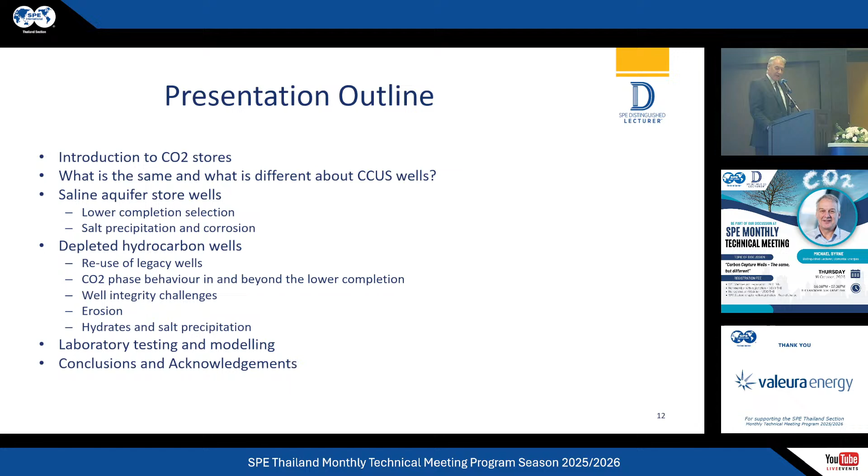I'll talk, because it's where I come from, about laboratory testing and about modeling, and what we can do in order to try to solve some of these new challenges that we have in these different types of wells. And then, of course, I'll conclude and acknowledge.

So what is CCUS? Carbon capture, utilization, and storage is the removal of CO2 either from emitted gas or directly from the atmosphere, the utilization of that CO2, for example in enhanced oil recovery, and the storage in subsurface reservoirs or what we call stores. But essentially these are very similar to the reservoirs we've dealt with in oil and gas for many years, and sometimes they're exactly the same because we're just putting CO2 back in.

This presentation won't talk about capture or utilization. I'm just going to talk about storage and the wells that we put into those different types of stores and the challenges with those wells. So I'm focusing exclusively on storage in the two different types of stores.

Oh, sorry, it has gone.

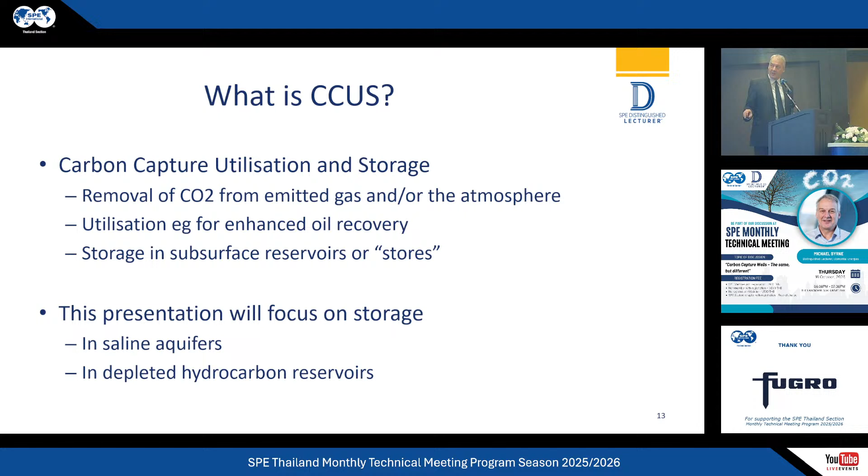So the first question: I said there were a lot of things that were the same about these wells as we're used to in oil and gas and water injection. So what's the same? Well, the broad purpose of these wells is the same - they are to connect the surface to the subsurface, to allow efficient communication between the surface and the subsurface. That's what any well we design and implement is for, and that's exactly the same for carbon capture and storage as it has been for oil and gas production wells and water injection wells.

And of course, we need to consider safety, well integrity, the upper completion, the lower completion, and the sand face design. Again, that's the same as we're used to, nothing different there. We need a multidisciplinary approach. If I've seen any change in our industry in my 35 plus years in oil and gas, it's that we've become better at multidisciplinary approaches. There's less of a siloed mentality now where drilling drills the wells, completions complete the wells, and production produces the wells. That integrated multidisciplinary approach across subsurface, production technology, production engineering, completion engineering, through to drilling and completions departments is much more effective, and it's absolutely required in carbon capture and storage wells.

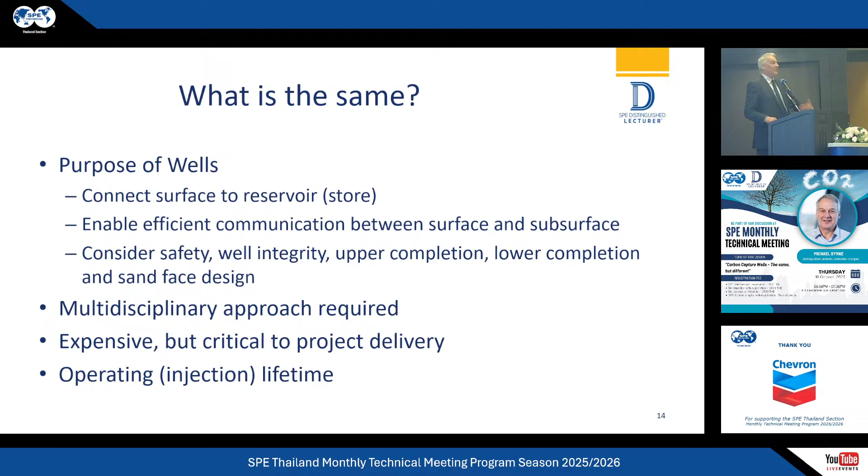And the operating or injecting time - the time we'll be injecting CO2 for - is broadly similar to the time span we design oil and gas wells for. It's maybe 5 to 50 years, depending on the well and the reservoir or store, but that's typical design life, so the injection lifetime of those wells is pretty similar to what we're used to. So lots of stuff is the same when it comes to carbon capture wells, and that's probably a good thing - if you're moving from oil and gas into carbon capture and storage, we have a lot of knowledge.

But there are some things that are different. Starting point: CO2 is different. It's unlike oil and gas and water - it has very interesting, challenging behavior that we need to understand when designing wells. We need to understand what the differences will be, we need to understand temperature, and we need to understand the phase behavior. This is a relatively simple phase diagram here.

Showing the phases of CO2. I say relatively simple because when we deal with CO2, we have to deal with enthalpy rather than just simple phase behavior, but for simplicity in a short lecture I'll leave it at this. We need to understand where we are in this phase diagram with the different types of stores we're dealing with, and therefore the wells into those stores. It's really important that we understand that fully, perhaps more so than when we're dealing with just water injection, where we're essentially dealing with single phase all the time. Here we're dealing potentially with multiple phases during the injection process, in the wells and in the store.

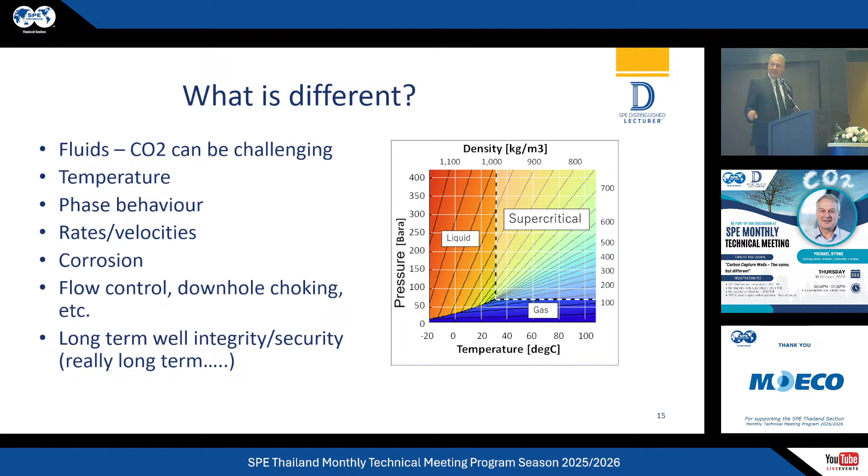So getting into the detail of these two different types of stores, I'll deal with saline aquifers first. Saline aquifers are basically just big reservoirs filled with water at usually significant depth in the subsurface. Because they're already filled with water, they're often at hydrostatic or normal pressure, and therefore any CO2 we introduce to those stores is going to increase the pressure in the store. So we're probably going above hydrostatic. What we need to ensure is that we can do that without compromising the seal on that store or reservoir.

For that reason, we need these things to be pretty big. We need them to have great lateral extent. And so when we're talking about an injection well, the reach of that well, which is permeability dependent, can be quite significant—it can be several kilometers, which is not necessarily what we're normally talking about when we design a water injection well. So again, that brings us some challenging design criteria when it comes to the well design.

The CO2 plume in a saline aquifer is gravity dependent. CO2, regardless of the phase it exists in—whether liquid, dense phase, or gas—will have a lower density than water. What that means is that the CO2 will tend to rise to the ceiling of that store. That's important because we're trying to manage the placement of that CO2 into the store, and it might lead us to change our well design, for example to inject more towards the base of the store to give us a greater volume of injection as the CO2 migrates up towards the ceiling. So there are some interesting design challenges when it comes to saline aquifers.

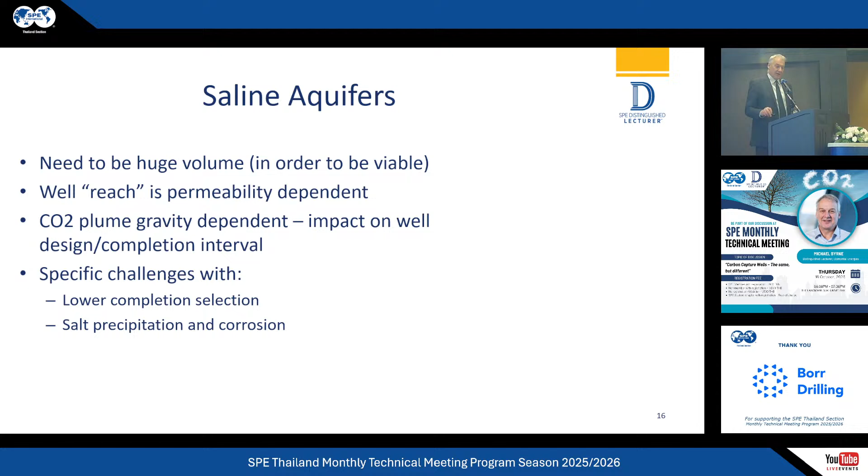We also need to think about the lower completion selection, salt precipitation, and corrosion, and I'll deal with each of those in a little more detail. So what about the lower completion? You might think, well, these are just disposal wells—we're trying to get rid of as much CO2 as possible. Do we not just keep it really simple? Case, perforate, inject CO2. Well, that might work for some stores, and I'm sure it will, and does work for some stores.

However, we need to treat these wells as we do with water injection wells for the potential that sand may come back into the well with time. With shut-in of the well, we may have cross-flow, where we have higher pressure in one part of the well than another, and that pressure equalizes through the well, potentially filling the well with sand. Or we may have a fluid hammer effect—so when we stop injecting CO2, we may have a pressure wave that can draw sand back into the well. For those reasons, we may want to deploy sand control, sand screens, potentially gravel packs in these CO2 injectors.

And to those of you working in oil and gas, you'll probably be thinking that introduces a bit of complexity. It introduces a little more challenge in terms of the fluids we can use, how we use those fluids, and how we get rid of those fluids if we need to before we start injecting CO2. Ideally, we would like to flow back these wells—we would like to produce them before we inject.

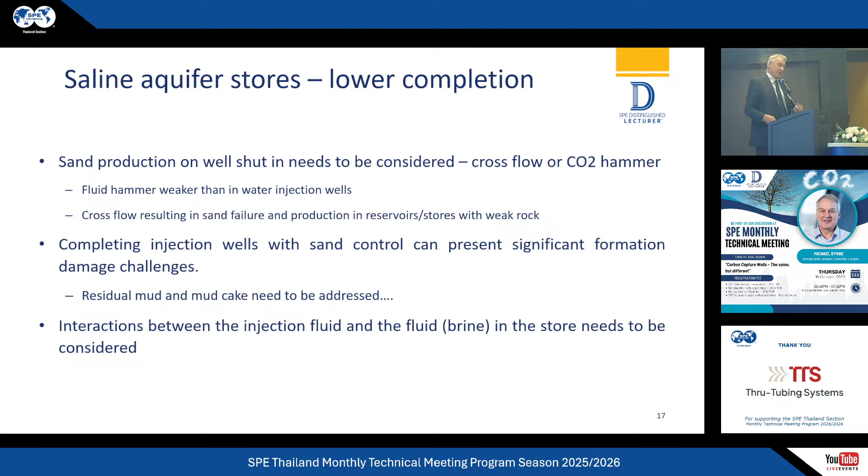When we complete with sand control, we really would like to flow back because we have a residual mud cake, regardless of how we've completed the well, whether it's standalone screens or open hole gravel pack. We will undoubtedly have something in the well that we'd normally want to flow back. We need to understand what happens when we drill these wells, because if we don't flow back, we chase drilling mud and completion fluid into the formation with CO2. We need to understand those interactions, which will differ from what we're used to in conventional wells.

For saline aquifers in particular, salt precipitation is a risk. We're injecting CO2, which is essentially a solvent, into a water-saturated near wellbore. We will undoubtedly dry out the near wellbore to some extent, precipitating salt. That is a challenge. If we precipitate salt in the near wellbore, will that affect our injectivity? There's no simple answer, but it's something we have to try to understand.

The salinity is very important. If we've got very high salinity, then the salt risk is higher. In saline aquifers, we have quite an abundant supply of water and therefore potentially salt, and we may have recirculation of water through the store. If we're just injecting at the top, we might have water coming back into the wellbore or near wellbore, bringing a fresh supply of potential salt. So this salted region in the near wellbore is definitely a challenge, particularly early on in a development.

The long and well-established Sleipner CO2 disposal project in Norway, which has been running for at least 20 years, had significant salt problems early on, and they had to water wash their wells frequently early in the development. Once they'd overcome their initial salting problems and essentially pushed most of the brine away from the wellbore, the problem disappeared. So it's something we need to be aware of in order to preserve our injectivity.

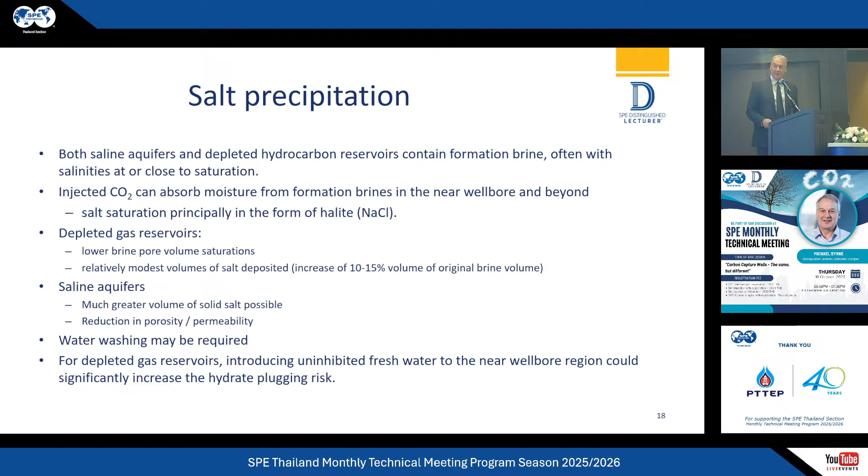Another risk, not exclusive to saline aquifers or to CO2 injection wells, is corrosion. With pure CO2, where there's only CO2 in contact with the wellbore and near wellbore, corrosion is not a risk. CO2 on its own is not corrosive. However, when we mix CO2 with water, we have the potential to generate carbonic acid, and carbonic acid is corrosive.

For that reason, we may have to deploy corrosion-resistant materials anywhere there's a risk of CO2 and brine being present together, either during injection or during shut-in periods. The shut-in periods here are critical. You might like to think that you can design CO2 injection wells to always be on injection and never shut them in. We know from our experience with water injection wells in the oil and gas world that this is not a practical aspiration. We will have to shut in these wells from time to time.

There are projects where delivery is by intermittent supply, by trucks or by ships, where we're designing in shut-in periods, and we'll actually be injecting for less time than we're shut in. All of that means that when we shut in the well, we need to understand if there's a risk of brine flowing back into the well, and if there's a risk of convection currents developing within the well immediately after shut-in that could carry brine or wet CO2 higher up into the well.

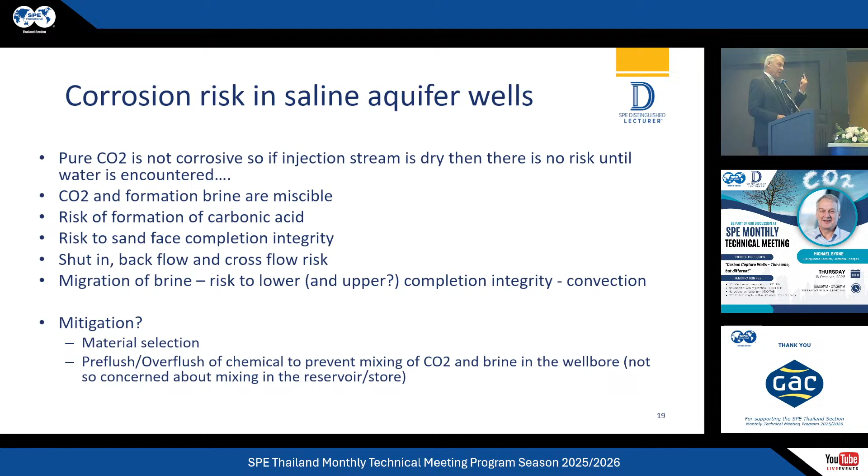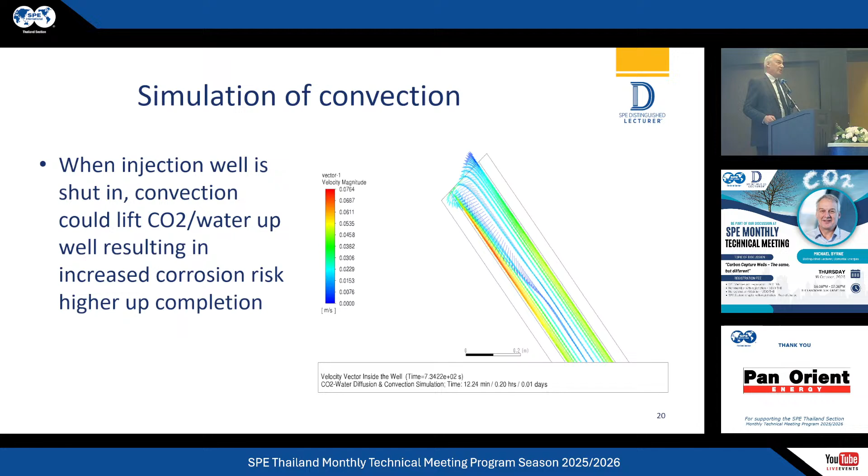This is a very important cost consideration in some developments, particularly in saline aquifers. You can see the animation has started again, showing all of this energy, all of these velocity vectors, representing the transfer or convection of fluid up the well once we shut it in.

And unfortunately, we're not just dealing with CO2. Most of the CO2 sources will be contaminated, meaning they won't just be CO2. In many cases I've worked with, we're looking at up to 5% contamination, and that contamination is expensive and difficult to remove. So we may have to accept sulfur oxides, nitrogen oxides, carbon monoxide, hydrogen sulfide, water, and more in that injection stream.

Now, many of these substances simply increase the corrosion risk, because not only might we have carbonic acid, but we can also have sulfuric acid and nitric acid, and these acids will increase the corrosion risk and mean we have to do something to mitigate.

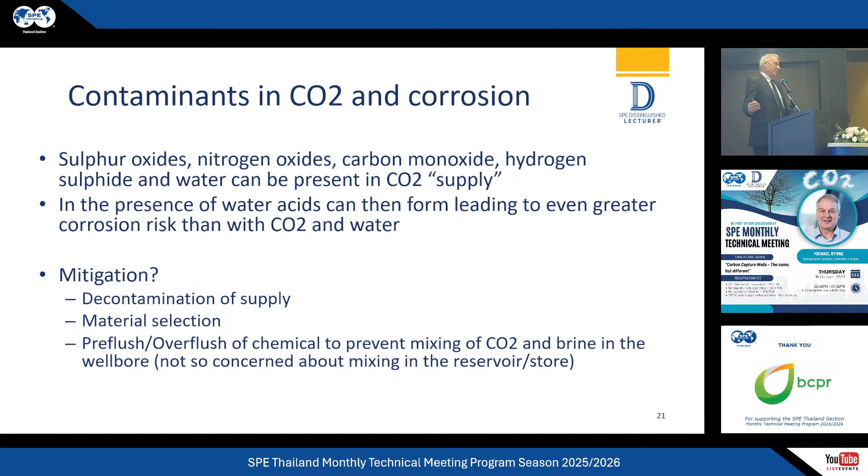Mitigation could include decontamination of the supply. It's three easy words to put on a slide, not so easy in reality, so it's important to consider. Material selection, of course—we can go with very high-grade alloys, adding significant cost. So we really need to understand this properly before we go down that road. There are also some chemistries we may be able to deploy to try to keep that mixture of CO2 and water away from the wellbore. Deeper into the formation we're probably okay, but it's in the wellbore that we need to be careful.

Okay, so moving to the second type of store—I said there are two types. Saline aquifers, I've dealt with some of the challenges there. Depleted hydrocarbons are in many ways quite different. These are reservoirs we've produced, usually for quite a long time, removing most of the mobile oil, or predominantly we're talking about gas reservoirs where we've removed a lot of the gas. That makes them almost ideal stores, because we know they've sealed that hydrocarbon for millions of years, so we know they are robust. They're essentially empty.

We've taken out a lot of pressure, we've taken out a lot of fluid, and we potentially then have a very simple solution to disposing of significant volumes of CO2. And of course, there are many of these stores being developed at the moment.

In these stores, though, some are so depleted that it's really difficult to drill new wells, because we've depleted down to such low pressures. I've worked on stores or potential stores where we're down below 100 psi. Now we're talking about drilling and completing into something with only 100 psi. So at the very least, we're going to be at significant overbalance when we drill and complete. And in the worst cases, we can't reasonably drill and complete when the store pressure is so low. So there are some considerations we have to have there.

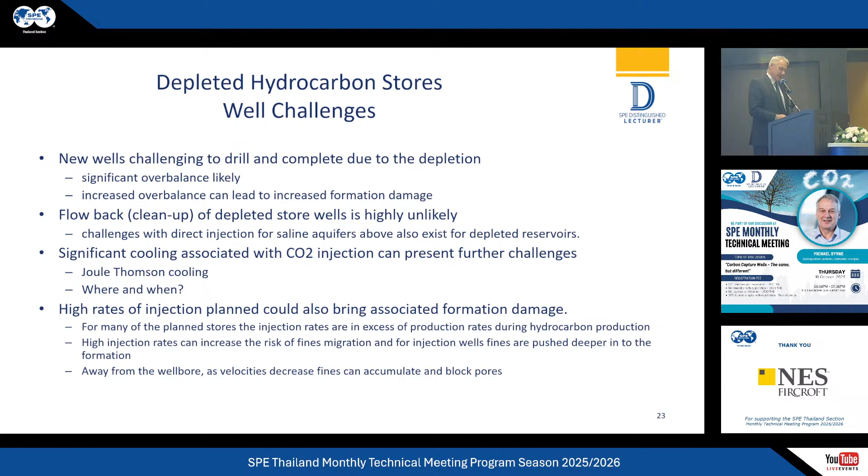We've got 400 million in some of our wells, but 200 million is still a pretty high rate. So we're used to that rate, but what we're not used to is less than 100 psi of store or reservoir pressure. What does that mean? It means very high velocity. If we have a combination of high rate and low pressure, that leads to high velocity, and I'll come back to that with a couple of examples.

One of the options for depleted hydrocarbon stores that are at very low pressure is, well, we've got all these wells that we've been producing from. Could some of them be turned around and used as injectors? These are often called legacy production wells, although I worked on a project in Spain recently where the operator liked to call these wells not legacy, but vintage wells. I'm leading a campaign to change the name legacy to vintage, because I think it sounds better. But anyway, these wells that have been there for a long time in these stores, could we not just use them as injectors? One of the good things is that that's relatively low cost.

We don't have to drill them again. We may not even need to complete them again if the completion interval is appropriate for CO2 injection. So that's a pretty good thing. That overcomes the challenges we face where we might not be able to drill new wells. So let's get some pressure in there through these vintage wells, and then we can drill new wells potentially for higher rate injection. They've also effectively been cleaned up for a long time, maybe producing for 30 or 40 years. The near wellbore in those wells, in my opinion, will often be pretty well cleaned up. So they seem like ideal candidates.

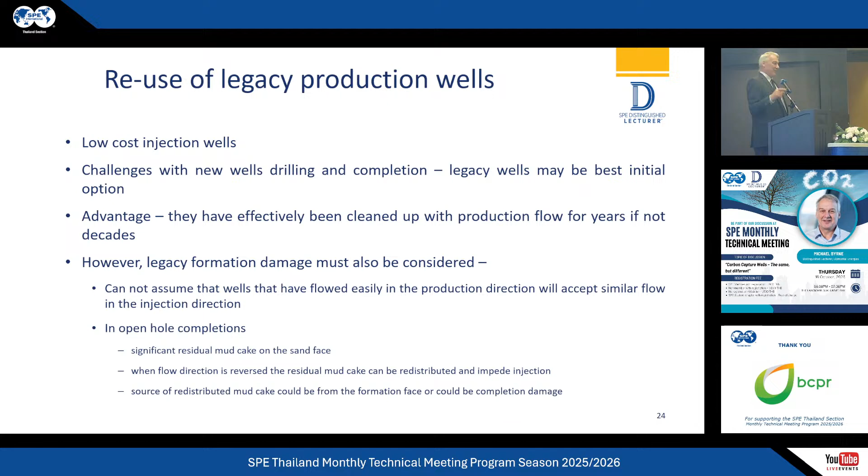And that might lead us into a situation where we have to, early on, create or develop some non-matrix injection. That's the politically correct term. Anybody want to say what non-matrix injection is?

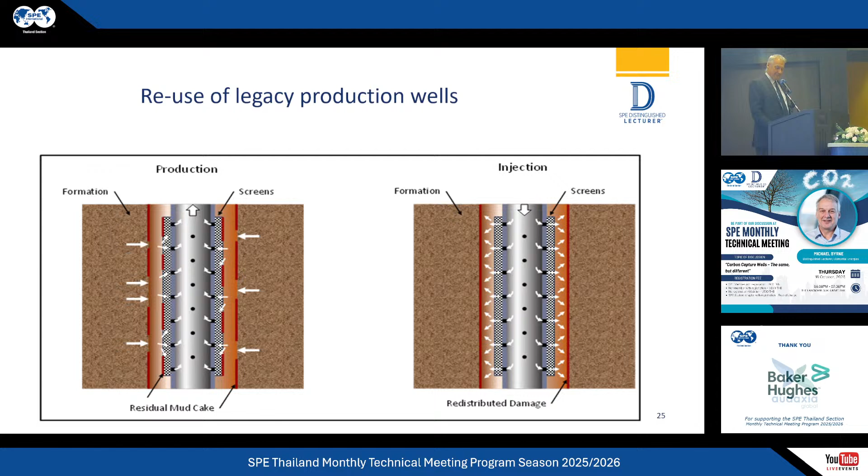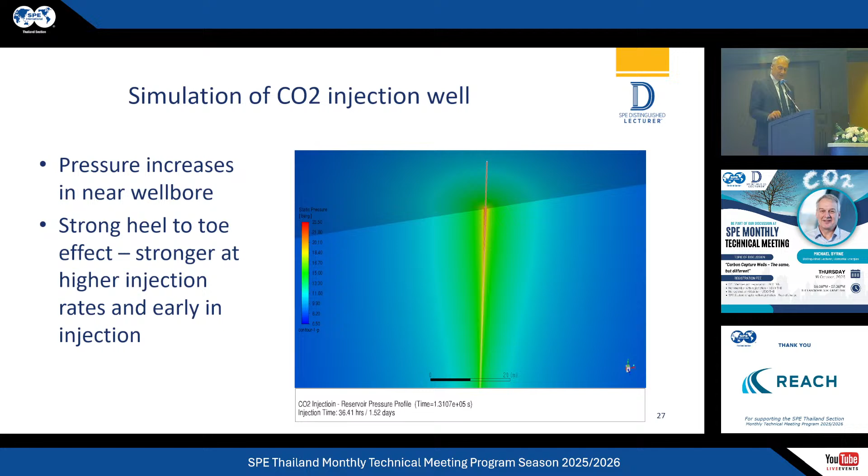This means we have to think carefully about our injection wells—where the flow is going to go. There's a mantra here that applies to all wells, whether CO2 injection or not: fluids will go where they want to go, not where we want them to go. So when we design the wells, we have to bear that in mind. We might say we'll complete the entire interval so fluids go into the entire interval because that's what we want, but when we start injecting, or producing in production wells, that's not always what happens. The fluids follow the path of least resistance, not necessarily across the entire completion. So we need to understand this carefully and properly for carbon capture wells.

So this is something different, and what we're seeing is an increased erosion risk in the lower completion. But I want you to think a little about what's happening just out in the formation, just away from the perforation or sand face—we also have high velocity there. So we can be dealing with velocities significantly higher than we've dealt with in the oil and gas industry before.

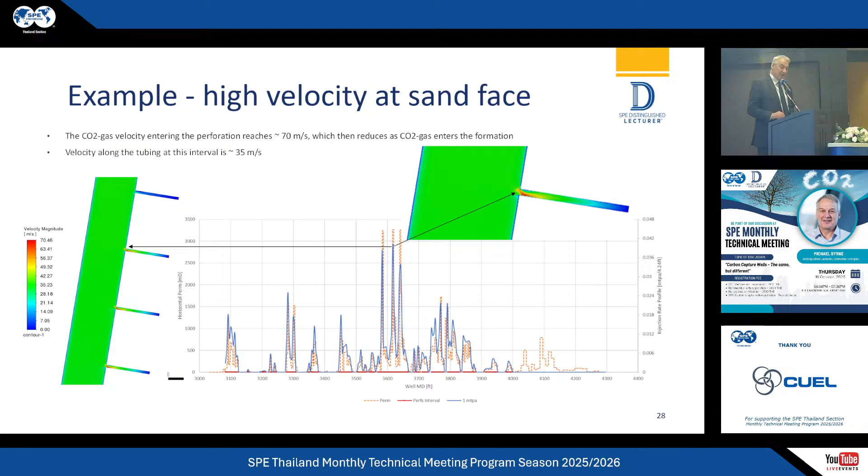Back in 2009, 2010, I was on a similar tour as a distinguished lecturer, a little less grey, a little less wise perhaps. As part of that lecture tour, dealing with formation damage, I used to throw paper in the air to demonstrate fines migration, a common damage mechanism. For years afterward, people would say, 'Oh, you're that paper throwing guy,' not 'world-renowned formation damage expert' or the guy who developed advanced numerical modeling for near wellbores. I'm not that offended, because at least they remembered something about my talk.

I thought it might be interesting to revive that demonstration, but with a bit of a CO2 view on it. Let me go down to the center of the room and use a strong voice since I have to move away from the mic.

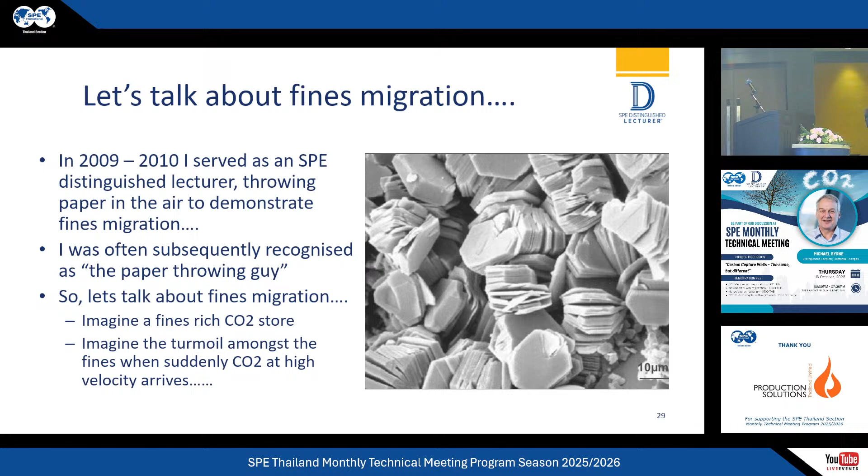Take this - it's flowing with CO2 through the pore, and now we come up to a pore throat. I can start to cover this pore throat, covering the exit to this pore. If this keeps happening, eventually we'll reach a situation where that pore throat is blocked. The CO2 trying to get in through that door - and somebody's just closed the door, so the demonstration is losing its effect - coming out through this pore throat, can't. So what happens next? It goes to the next room, and the next room, and the next room, and this same process happens in all of those rooms.

Eventually we get to a situation where we can't flow easily through these pores and pore throats because of fines migration. We've plugged the pores, the pressure builds up, the injection pressure builds, or the injection rate decreases. Fines migration in the near wellbore can cause significant problems in conventional oil and gas reservoirs and now in CO2 stores. I'm not saying this will happen in all stores - it's very geology, rate, and chemistry dependent - but it's something we need to think carefully about, especially with the high velocities we're considering.

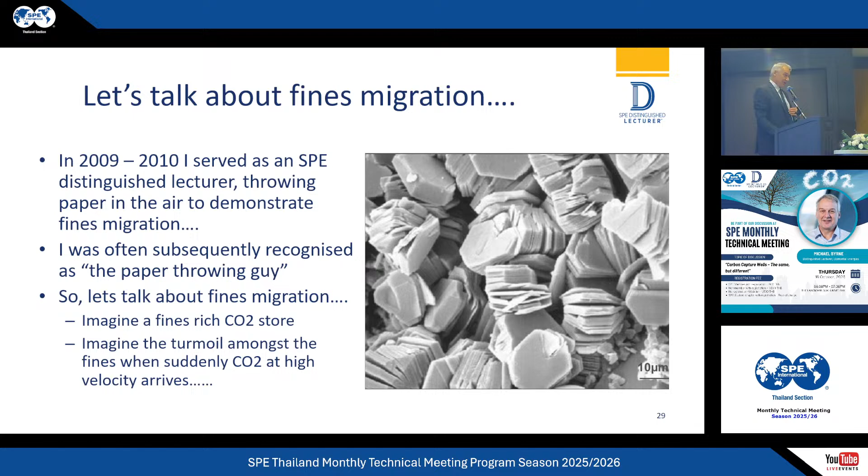Another particular challenge for depleted hydrocarbon stores, because of the low temperatures we may see at the sand face and inside the near wellbore within the reservoir, are hydrate and ice formation. If we're below 0 degrees C, there is potential that any water in the near wellbore turns to ice. There is also potential that we get CO2 hydrate formation as the CO2 meets the water in the near wellbore.

Both of those challenges can lead to permeability decline, to pressure buildup, to injectivity inefficiency. So we need to understand whether these things are going to happen or not.

We need to understand what the salinity of the water is, because that affects the potential, particularly for hydrate formation. One of the good things about ice and hydrate formation, unlike salt precipitation, is that ice and hydrate will melt. So if we stop injection, the temperature rises, the ice and hydrate melt and disappear essentially. So it is something that we could potentially manage through well shut-ins. But of course, well shut-ins may cause us other problems. So again, it's a balance that we have to strike and find.

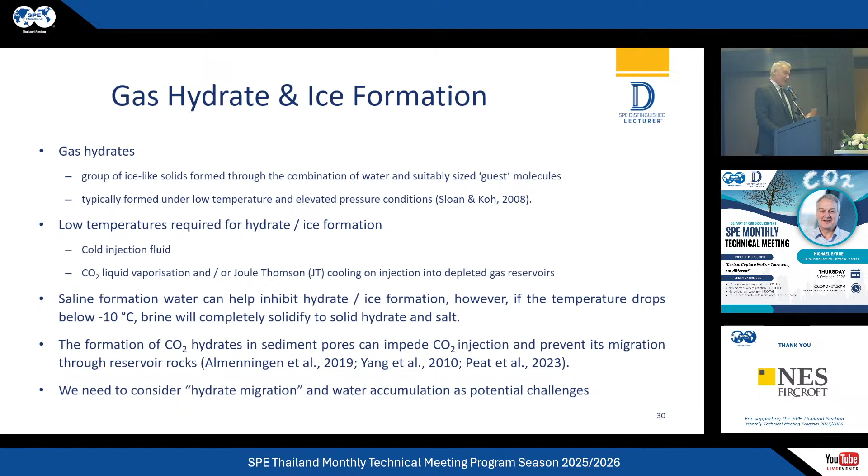Because many of the wells that we're implementing in these stores are wells that we really don't want to have to try to get back into. So we need to get it right from day one. We don't want to start getting into interventions.

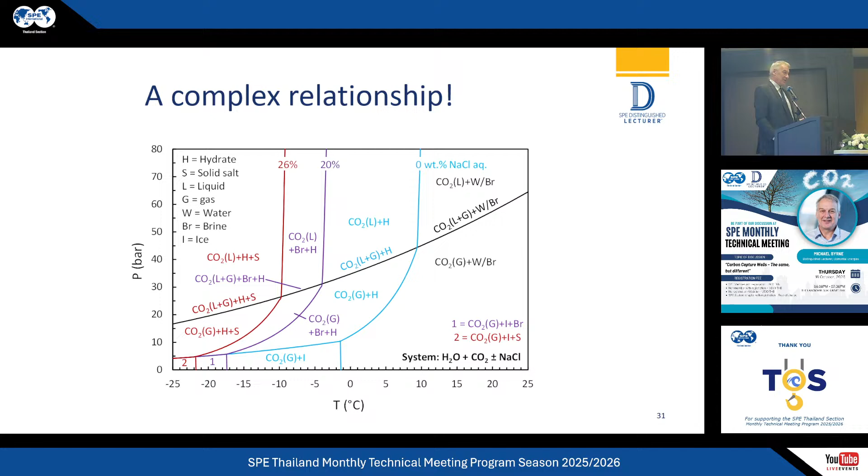Well, why is that important? Well, that's a leak path. That's a well integrity issue, and the CO2 that we're trying to inject potentially will be traveling back up again in this leak path. So we need to be careful when we're designing these wells, new wells in particular, as to how we use conventional cements.

Do we use extreme low temperature cements? There is new technology that has been developed and is still being developed to try to mitigate some of these challenges that we have, particularly with low temperature in depleted hydrocarbon stores.

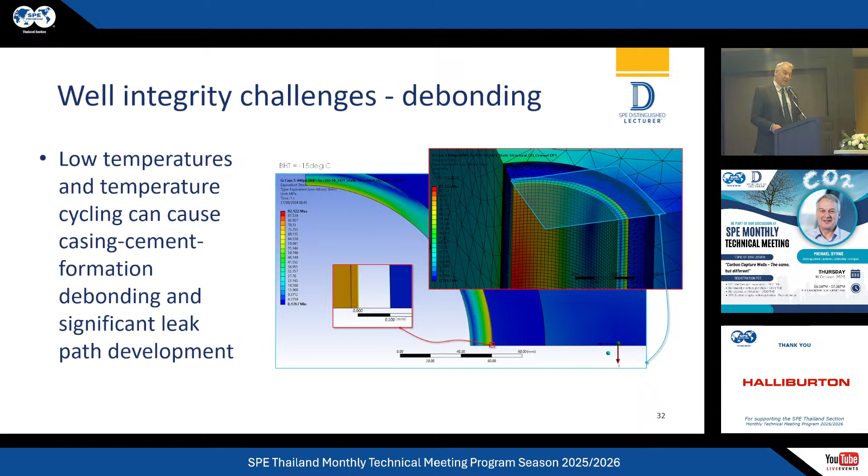And just to mention downhole choking. This is actually quite an important topic when it comes to some depleted hydrocarbon stores, where we're trying to control phase behavior at various different rates of injection. And it's not an easy thing to do.

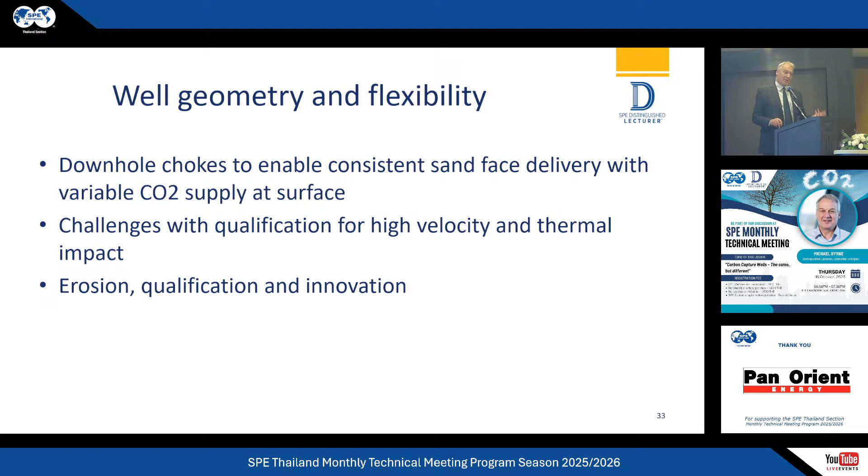But there are downhole chokes being developed, some of them relatively straightforward, but some of them quite complex, with complex controls, complex components that we need to make sure work, because we haven't used this type of equipment before under the conditions that we're going to be operating. So it's an important area that we need to understand for erosion. We need to go through qualification, and we need to realize that we're dealing with innovation here.

With many of these challenges that I've spoken about, there are tests that can be done. There's laboratory testing, there's screening of fluids, there's mixing of fluids. Many of those tests are just the same as we've been doing for years and years in oil and gas. However, we need to be using CO2.

So early on, when we started to look at CO2 injection wells and started doing laboratory tests and things like return permeability, there were laboratories that were testing with nitrogen gas instead of CO2 because it's easier. And to me, that's just nonsense. We really do need to be testing with the fluids that are going to be there under the conditions that are going to be there in the wellbore in order to understand them properly.

So if you have core and you can replicate the velocities that you're likely to see in the near wellbore, you can identify if fines migration is going to happen or not. In some cases, it's not going to happen, and you don't need to worry about it, but you can't tell that just by looking at the rock. You really need to replicate it to see if it's going to be a challenge.

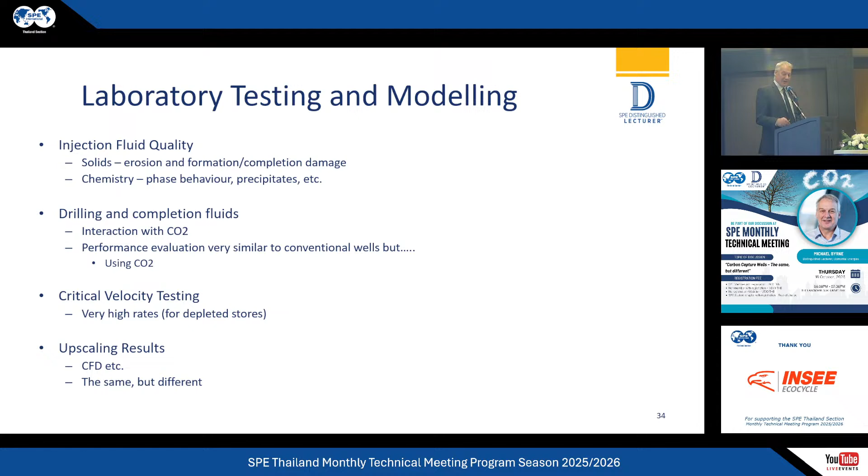So in conclusion, what I'd like to suggest is that there are many well design and construction challenges associated with the injection of CO2 for CCS. These wells present us with challenges. They vary depending on the initial conditions of the store - is it a saline aquifer or is it a depleted hydrocarbon reservoir?

And what exactly are we talking about? Do we have a potential to have heated supply of CO2, which would mitigate some of the temperature problems that we see in depleted stores? So there are a lot of questions and a lot of differences.

And those challenges that we face, some of them are pretty similar to those that we faced in the oil and gas industry for years and years. There's no industry better placed to deal with these wells. We have lots of useful experience from decades of implementing oil and gas production and water injection wells.

And most of these challenges can be addressed through study, through understanding, through laboratory testing, through modeling. We can actually understand these phenomena, even though some of them are quite complicated. The tests and modeling we do are actually quite similar to what we've done for a long time in the oil and gas industry. But we need to take into account that we're dealing in particular with a very special, very different type of fluid. CO2, as I said at the start, is challenging or interesting, depending on your point of view.

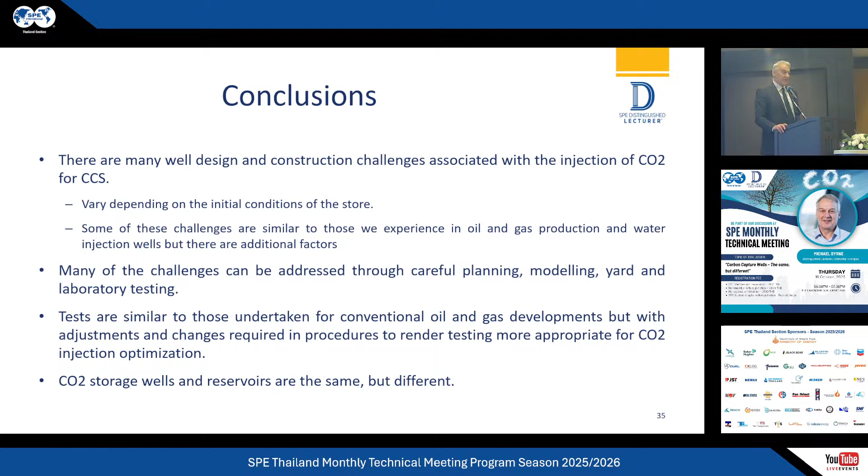So it does present us with some interesting challenges, but actually there are some really interesting and useful things about CO2 as well. Its viscosity, for example, when it's in dense phase, is very low, so its injectivity is vastly improved once we get into dense phase. So there are some really different and interesting things we need to understand. And so I would conclude by saying that CO2 storage wells and reservoirs are essentially the same, but they're different.

So I'd like to say that I'm relatively new to carbon capture and storage wells, although I've worked on, it feels like, many wells in the last 5 years. But my knowledge has been significantly enhanced by working with some experts in their fields.